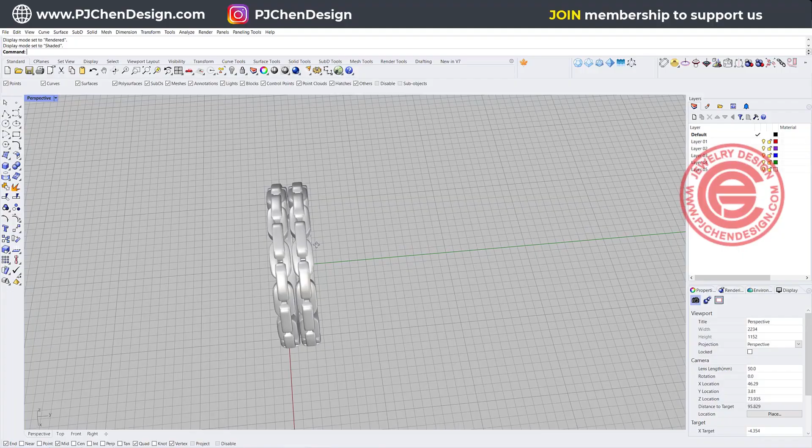For this ring band, you can build them as wide as possible and stitch them all together, or you can build them one by one like what I have here, which is a stacking ring. You can also custom design them to go all the way to the bottom, or just have one third of the bottom open, which I always suggest because that's where you cut your ring shank when sizing, without worrying about the pattern.

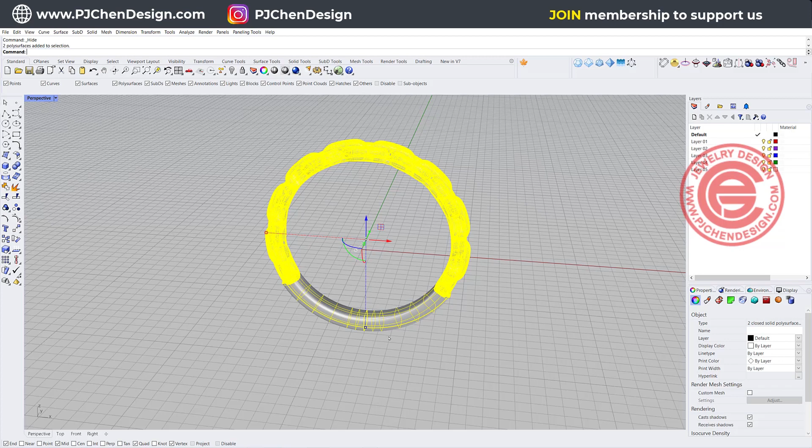Alright, that's starting from scratch. First, we are going to use the circle command to decide what ring size you want. In my case, I'm using 16mm.

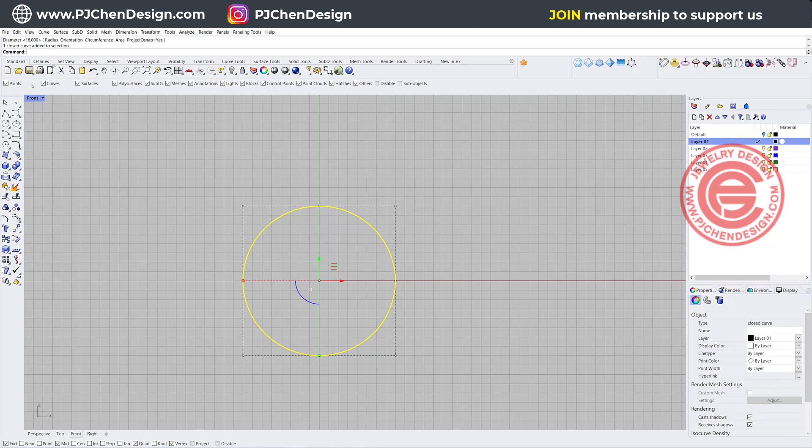With this 16mm, then you're going to decide how your pattern is going to flow. So we need to have them flat first. Let's use the length command to know the circumference. In this case, it's 50.265.

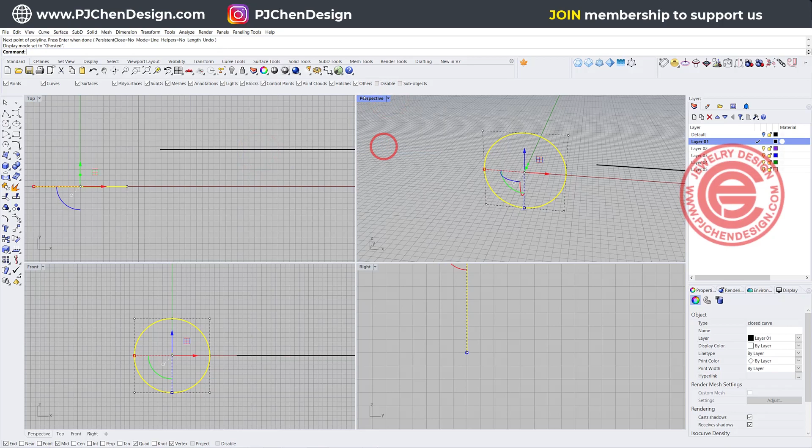So I'm going to come into my top view and draw a straight line right here, using exactly the same number, holding my shift, so I will get a line there. This line represents the circle when flattened, which is also the circumference.

So we are going to design our pattern right here. I'm going to come into my top view and see what size of the link I'm going to do. I'd like to use the rectangle conic corner, so you just right click on the icon and then draw any size you like, something like that. A little bit of corner, something like that.

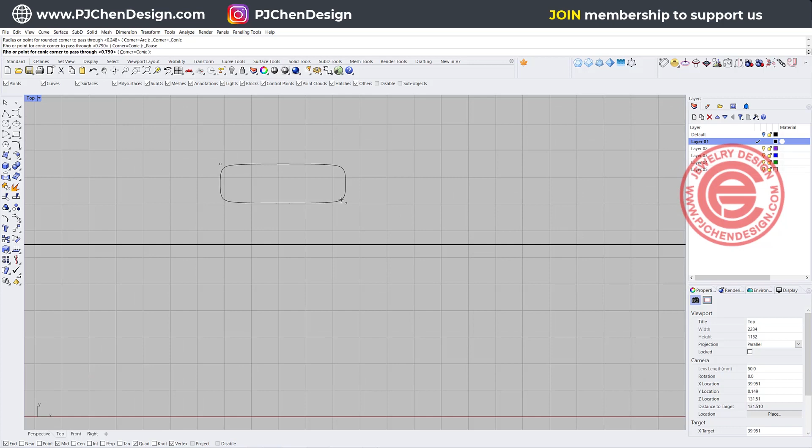Alright, and if that link is too big, you can always scale it down. I will scale it down on my curve instead of the solid, because when you have a solid, you have to consider the thickness.

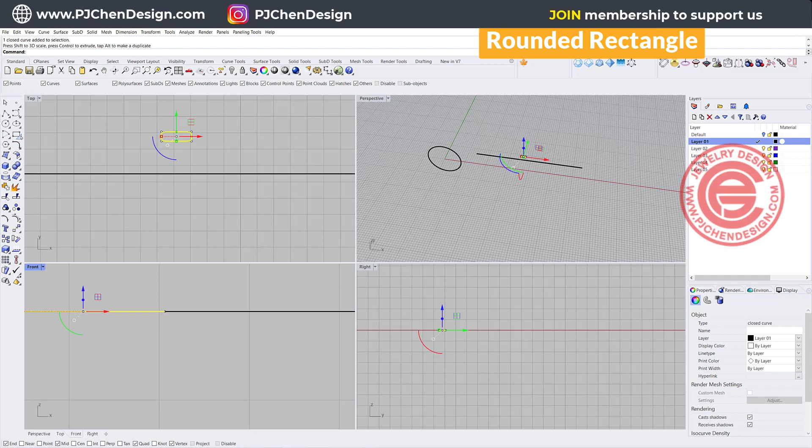Once you are done, come into the front view, and we are going to use the conic corner to create another rectangle conic corner, snapping right here to whatever size. Something like this. This time I can make them a little bit rounder, and I also want to align horizontal. Type it 0 here, so then we have our first link.

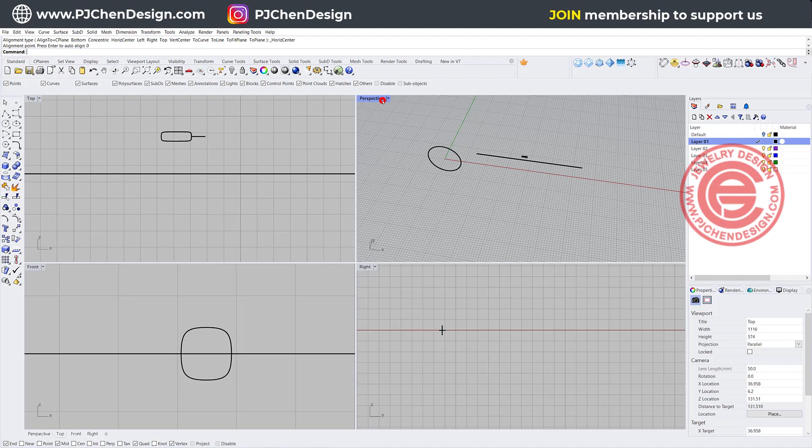Now you can give it a try for the surface using sweep 1 rail. This is the rail, this is your cross section, and don't forget to record history because you can change it easier. Alright, so that will be our first link.

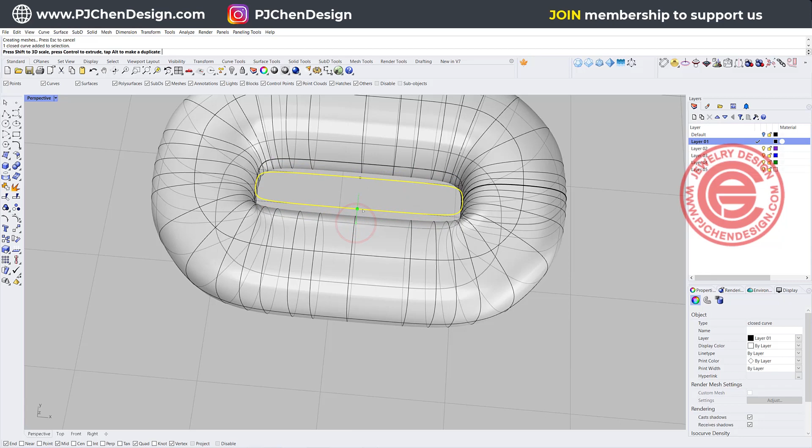If you feel like this link is a little bit too fat, you can 3D scale it down, something like that. You can also take a look at the cross section and see if you want it thicker or thinner. In this case, I do want it a little bit thicker so it's better for the casting.

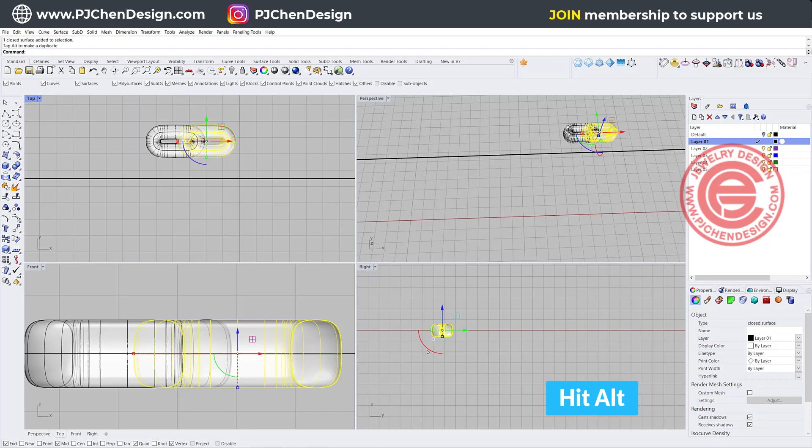Alright, we also need to do another test. We are going to move one to the side. Hit the Alt key for the copy and rotate it 90 degrees. Let's take a look if we like the look.

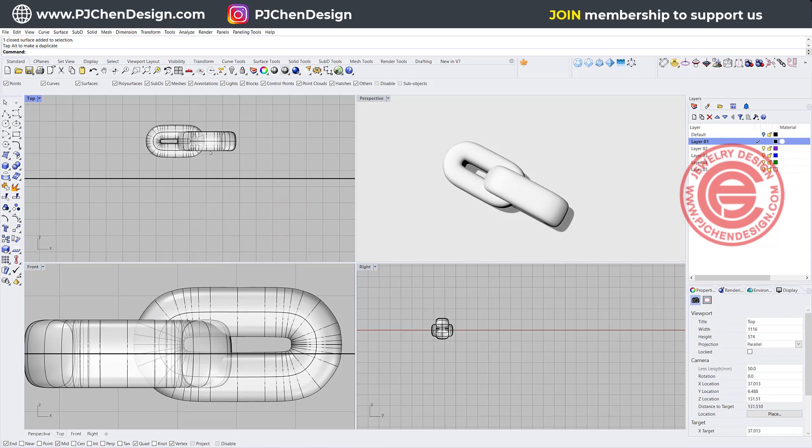Since this is actually going to be a ring, you don't have to worry about if it is actually movable, but we need to have it make sense. In this case, it doesn't make sense because it looks like it's completely jamming in there. So I'm going to move this one up a little bit just for the illusion. Jewelry is all about illusion, moving it in a little bit. So if I make something like that, it makes more sense even though it is overlapping together.

If you feel like this is overlapping way too much, bring in the curve and 1D scale it a little bit wider. Since we still have record history on, we can continue to change it until we find something we like that doesn't look so weird.

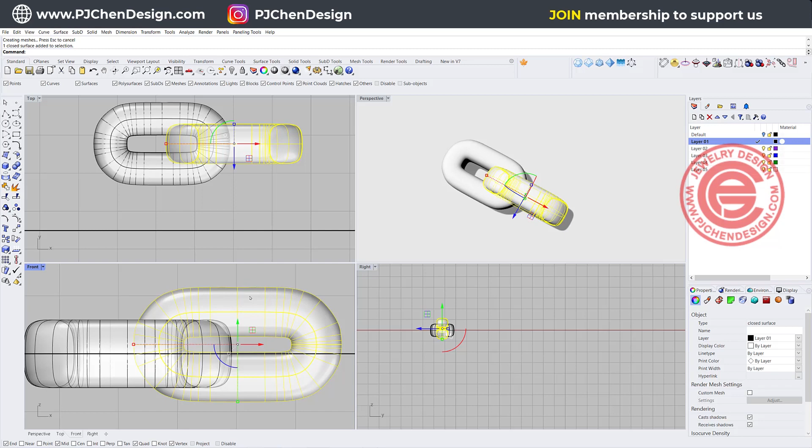Once you are done, we need to delete this one because those two links are no longer the same. We again are going to make a copy with the gumball. Just hit the Alt key, and using the gumball, rotate it 90 degrees, and we get something like this. Again, I'm going to move it up so it doesn't look like it's sticking inside too much.

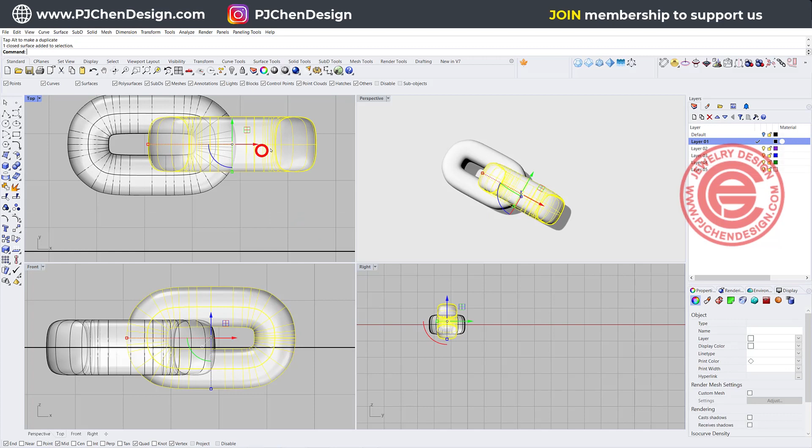Alright, so that is our first set. Then what you want to do is a test for those, depending on what length you want.

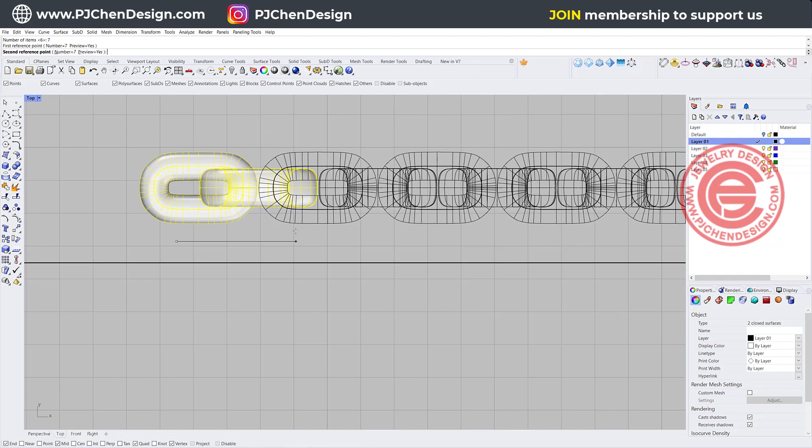We are going to use this linear array, and we'll set it up for maybe 7 sets, and let's go ahead to manually move them. You kind of need to eyeball it to make sure they are looking equal on both sides of the link.

Alright, you want to have a little bit of gap there. If you don't want to have a gap, that's fine too.

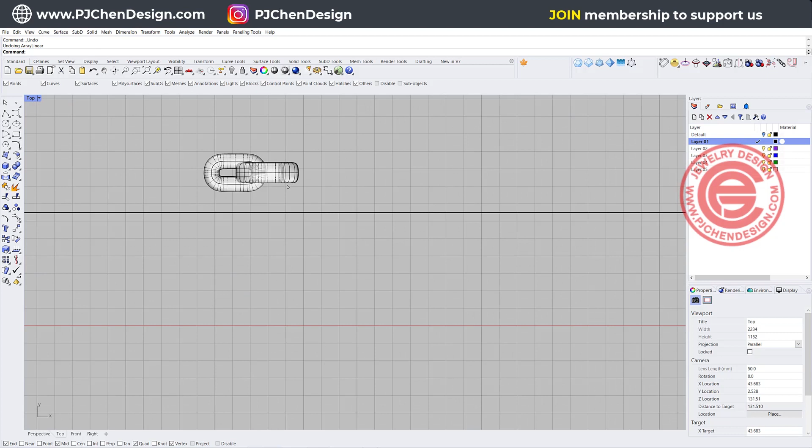In fact, no gap makes for a better casting, but with a gap it has a better look. Double check that that is the length you want. If it is not, go ahead and make it even longer - it's always much easier to make them longer and then delete them. So I'm going to do 10, and then move it here, holding my shift while I'm moving them, to do something that looks like this.

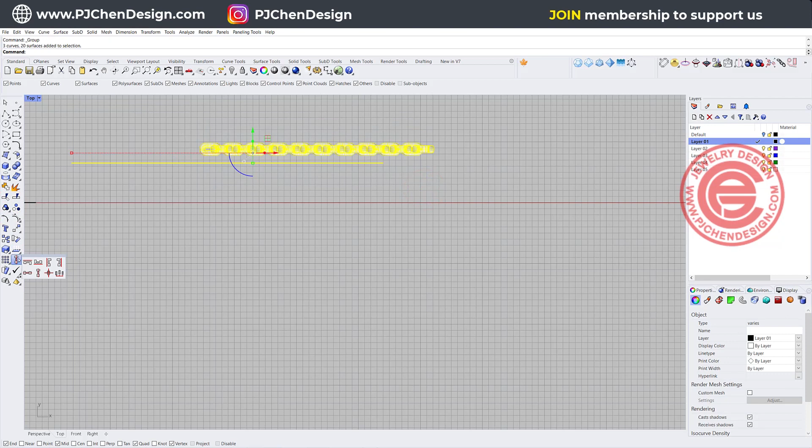All right, if that worked for you, go ahead and group everybody. We wanted those two to be aligned, so let's use align centers and move it here. It will say you break the history, but that's okay.

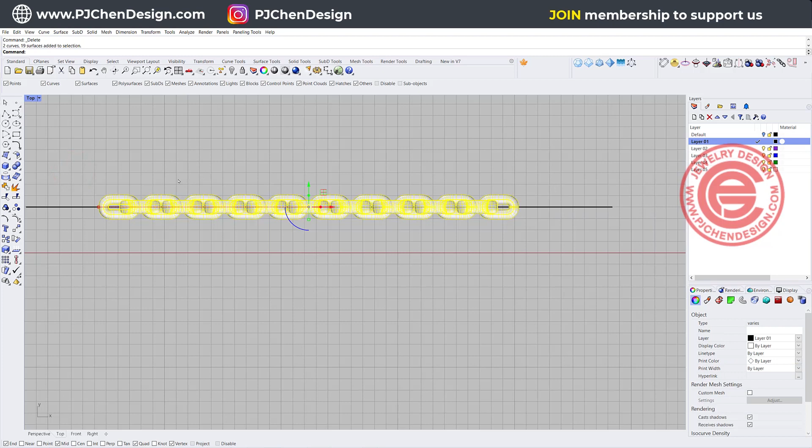One thing to pay attention to on both sides: let's ungroup it. This side has this orientation, the other side should be the same, so I'm going to delete one of them. Then I'll group again and use align centers to align them together so both sides are the same.

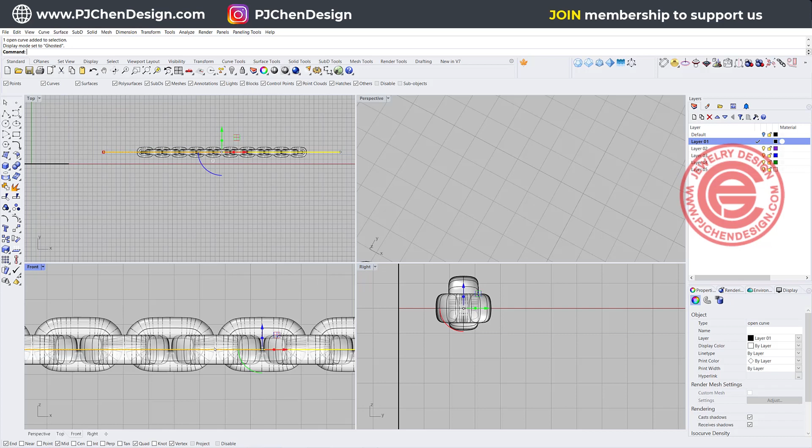All right, so we are going to flow it back, but double make sure that this curve, if you look at my right view, it's right in the center of the object. I need them to go a little lower, something like this, and I won't trim my object right now. I'll trim it or bevel it a little later. We just need something to intersect there so we can cut it off inside the ring shank completely flat. All right, let's give it a try.

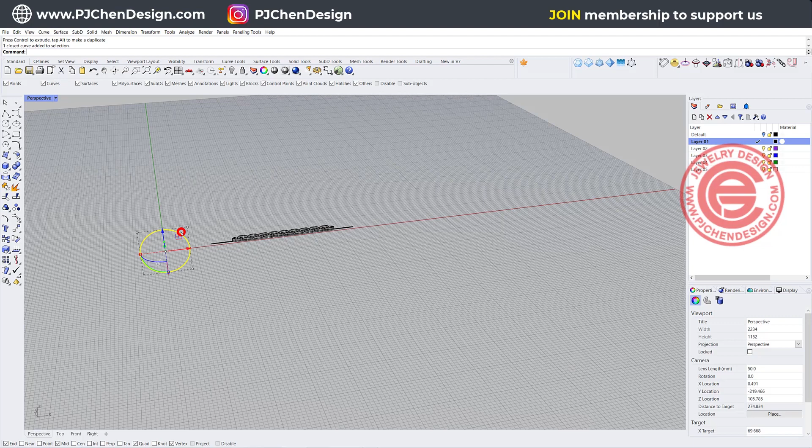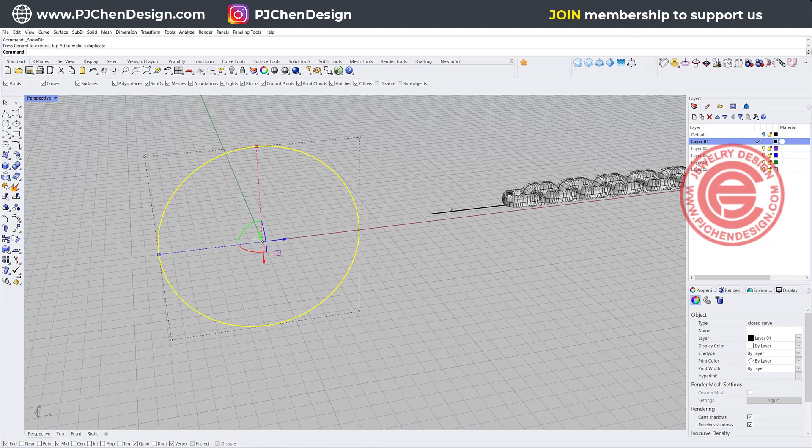First, double make sure where the seam is, and you can find it by using analyze the direction. Show object direction, and you'll see an arrow right there - that is where the seam is. So let's rotate it 90 degrees right there, starting right here, which means my ring shank will be on the bottom instead of on the side.

That's using the command for flow. You can find it under transform, then you have flow along curve. Those are the objects you're going to flow. Hit enter. This is the end, and we are going to click on the target.

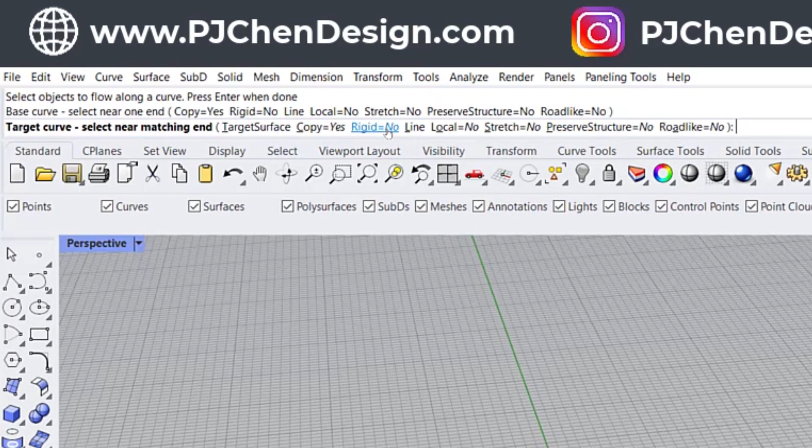Make sure the Rigid is equal No here, otherwise they will be really stiff. Then click it right here. Once it's flowing right there, double make sure it's in the correct direction. At this point, if you feel like this gap doesn't have enough room for your model, you can always change it.

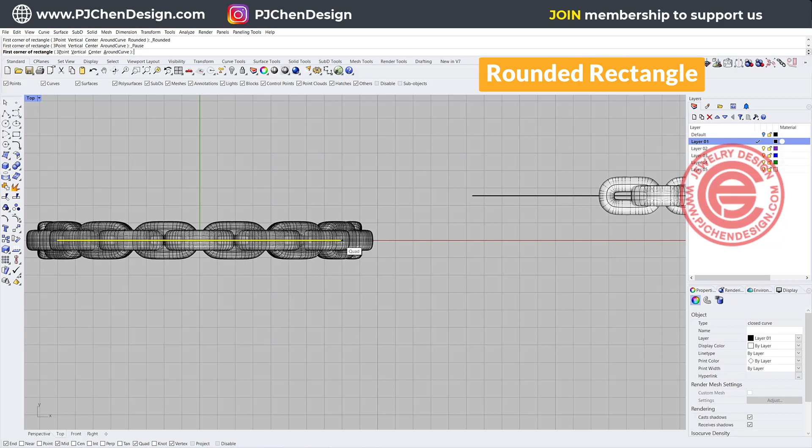I'm going to come into the top and create a bottom of a ring shank. So this is where my curve is. I'm creating a rounded corner rectangle snapping into the quadrant, and I want to create something like this. Having this one move it back, I'll align horizontal center and type 0 here. All right, so this is the ring, and this will be a little bit over, depending on how you like it.

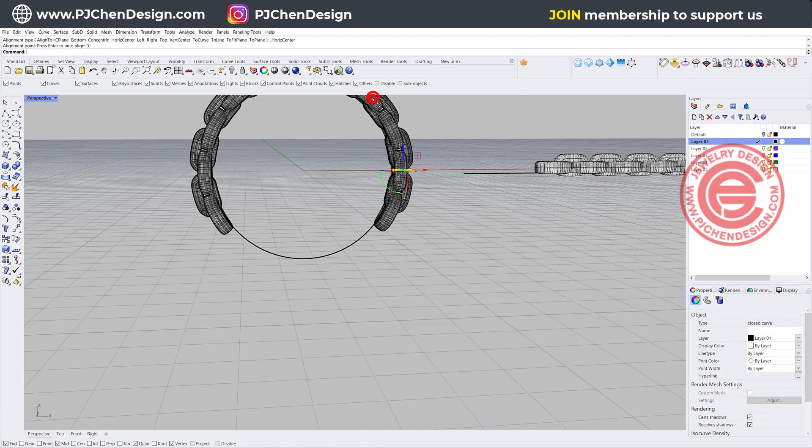Let's take a look on the side. We can remove those two links at the end and have it starting from here, or cut it, chop it off at the end, and see which one works better.

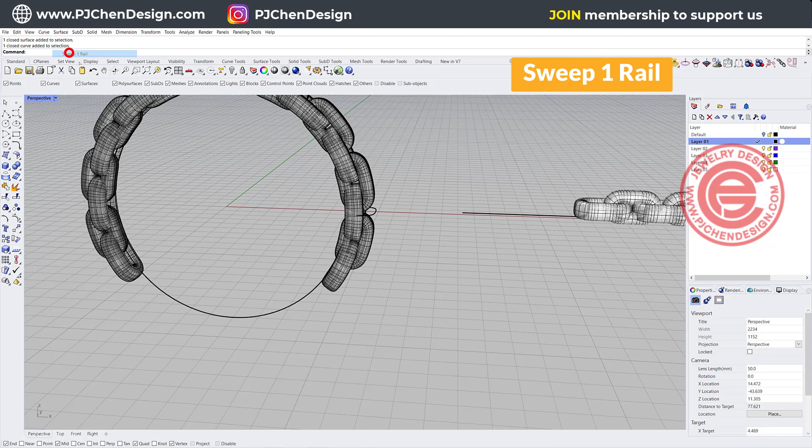It's up to you, but what I want to do to make sure they look good is come in with the surface tool for sweep one rail. You've got this rail and this cross section. Make sure you record a history.

So this is the point where we need to know where we are going to cut. It will look nicer - this actually has more connection between the two links, right?

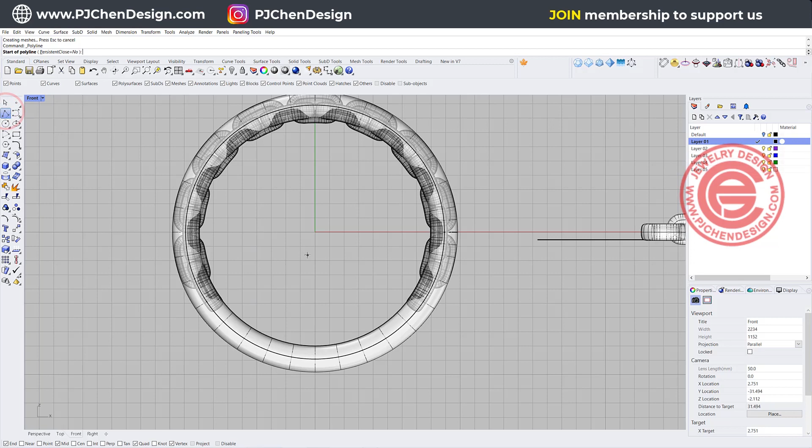So I'm going to come into my front view and draw a straight line snapping into the 0, and snapping right about here. This has a better connection right there, so I'm going to do something like this. Then I'm also going to mirror that to the other side, and use those two to trim off the top portion.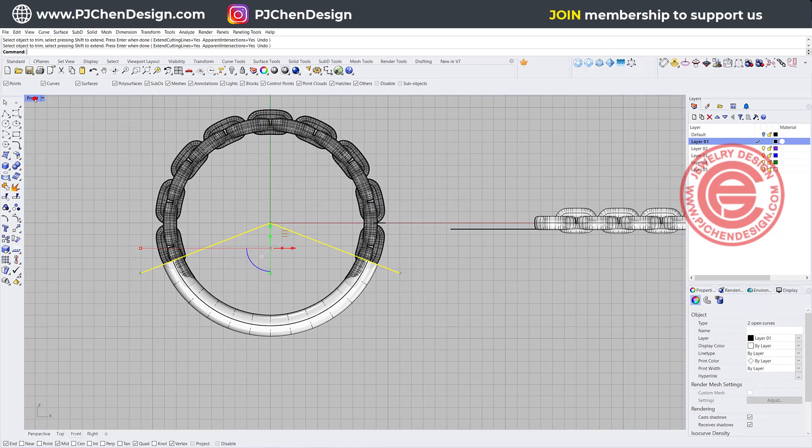And take a look if this is what you like. Of course, it will say break the history, but if you don't like it, you just need to go back. Actually, I think this is all right there.

So we are going to use the cap command. I also want them to be a little bit rounded, so let's use fillet edges. I'm going to do 0.25 on that side and 0.25 on this side.

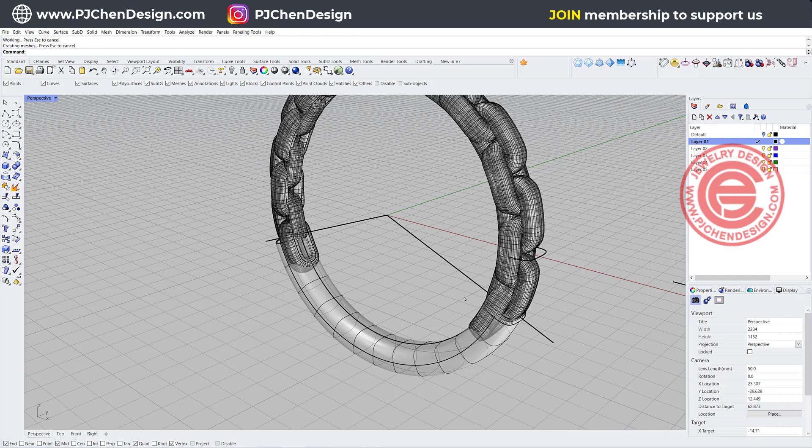Now we also need to use those two to trim it off where it is inside of the ring shank - that doesn't look good, right? So let's go ahead and trim it off. This one right here and this one right there.

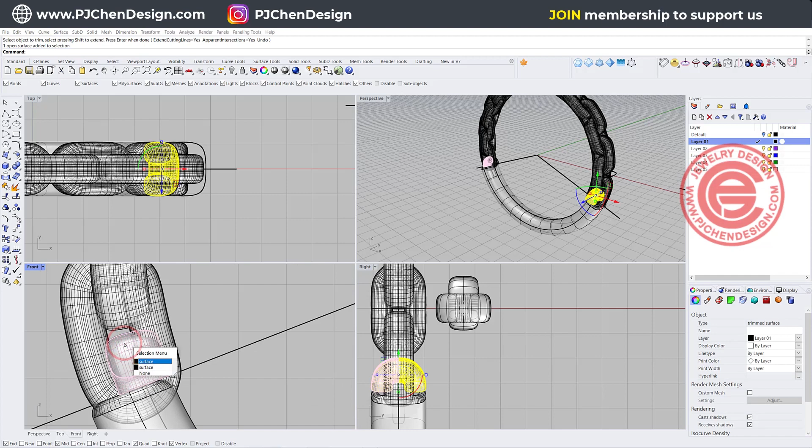Once we trim it off, make sure this one is now an open polysurface, and then we need to cap them in order to make it solid. All right, let's go ahead and Boolean union everybody on the top.

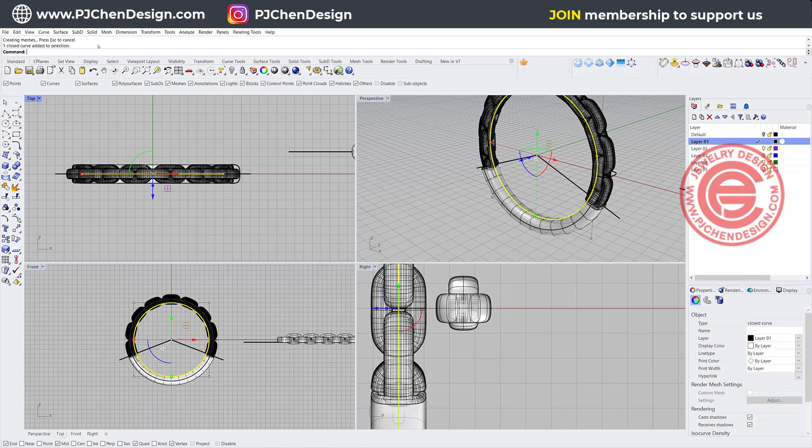Now look inside the ring shank - we intentionally want them to come inside of the ring so it has some intersection that we can Boolean off. So let's pick up the ring rail, go with solid extruded planar curve straight, and then use Boolean difference to cut this one out of this one. So now we have a clean cut.

Let's take a look on the render view. You can always do the two-tone if you want to, and that will be our demonstration today.